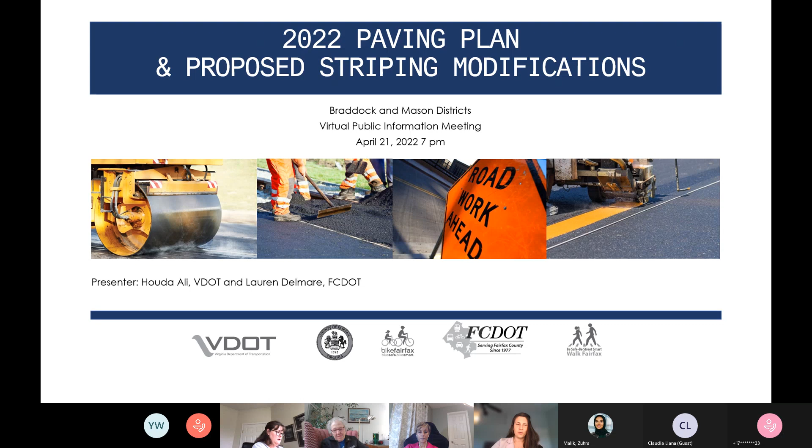Great, thank you so much. So I'm joined today by Houda Ali of the Virginia Department of Transportation, and we're going to go ahead and go over the 2022 paving plan. Houda's going to take over, and then I'll describe the proposed striping modifications that we have in the Braddock and Mason districts this year. So I'm going to turn it over to Houda to get us started.

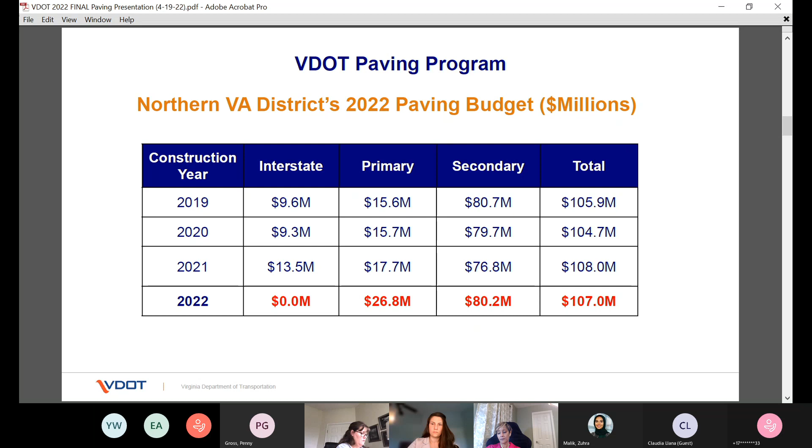Moving to planning and construction for paving. The construction aspect of paving is a seasonal process during the warmer weather months, from spring to early fall. However, the planning process is a year-round process. It starts in the spring going into summer and fall, with data collection for the next season.

Over the summer into the fall, we start analyzing the data, determine how many roads need to be paved compared to the available budget, prepare the schedules, and coordinate with central office. Later in winter, we close out previous contracts, put out new contracts for bid, and we award and execute new contracts by February into March of the paving year.

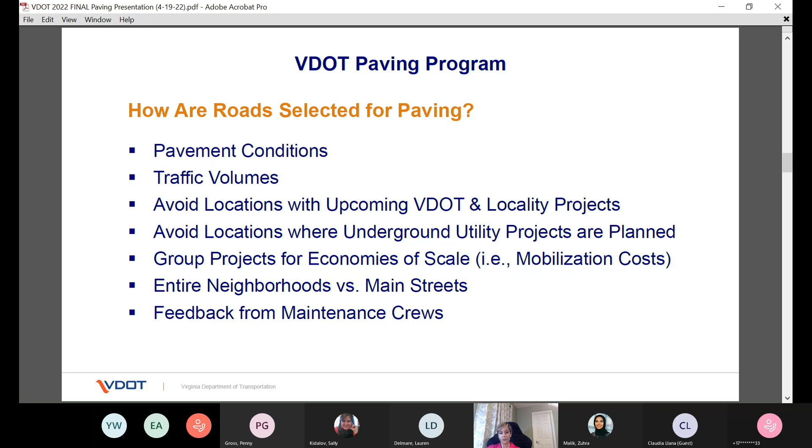So how are roads selected for paving? This is a question we get quite often. The process is generally data-driven based on several factors: pavement conditions based on current ratings, traffic volumes, avoiding locations with upcoming VDOT and locality projects, avoiding locations where underground utilities projects are planned, and grouping projects for economies of scale. What that means is we consider entire neighborhoods when we pave a main street within that neighborhood to achieve efficiencies in contractor mobilization. We also receive feedback from our maintenance crews who are most familiar with the roads in their areas.

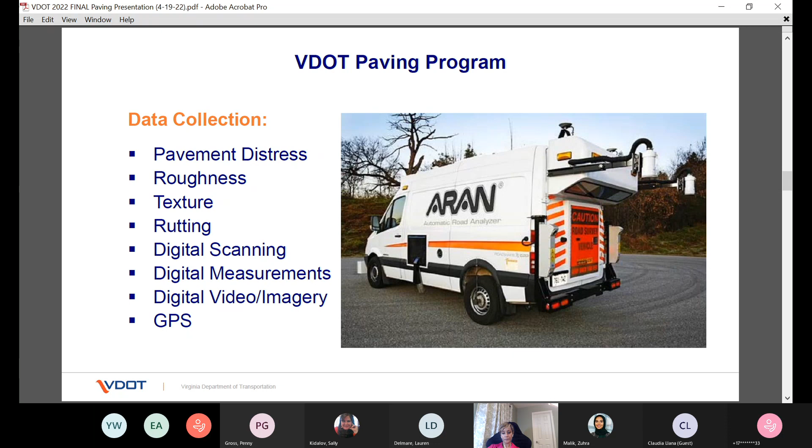So how frequently do we collect data? It depends on the type of road. Data is collected annually for interstates, primaries, and high volume secondaries with average annual daily traffic volume higher than 3,500 vehicles per day. For low volume secondaries, below 3,500 vehicles per day, with route numbers higher than 600, which make up the majority of the lane miles we maintain, including subdivision streets and neighborhood roads, we cover 20% every year with the goal of covering the full lane mileage inventory every 5 years. This longer cycle is mainly due to limited resources for data collection and repaving.

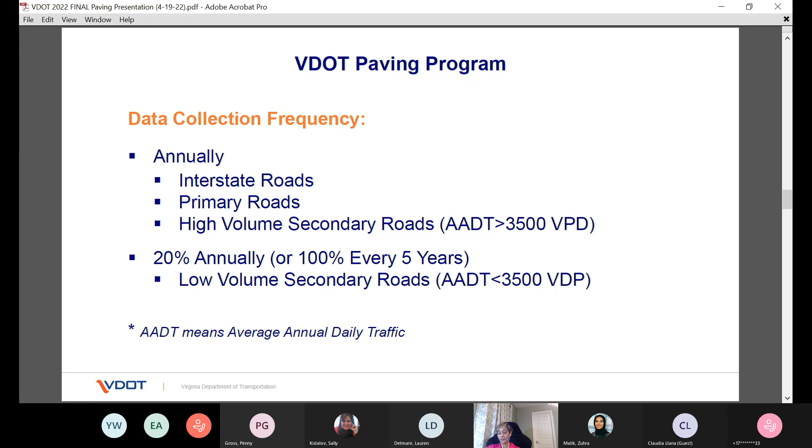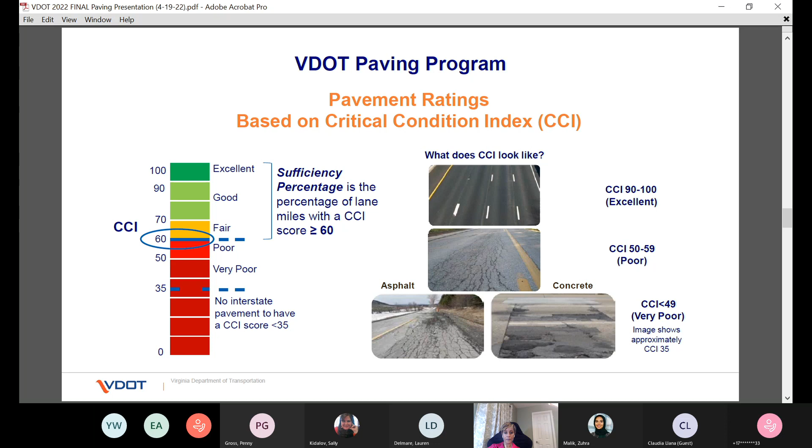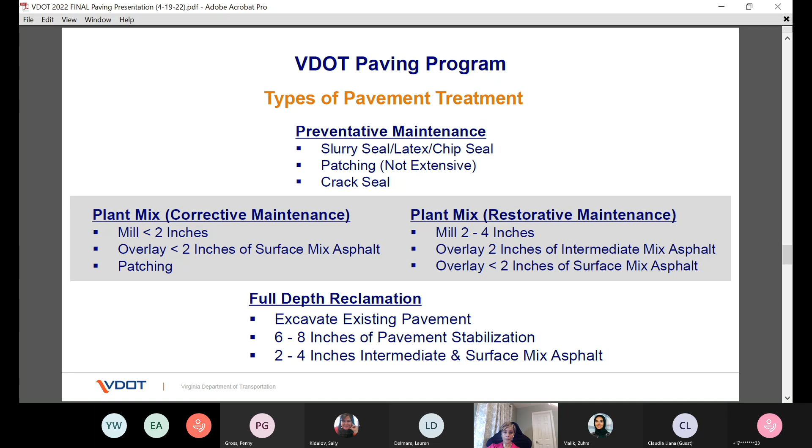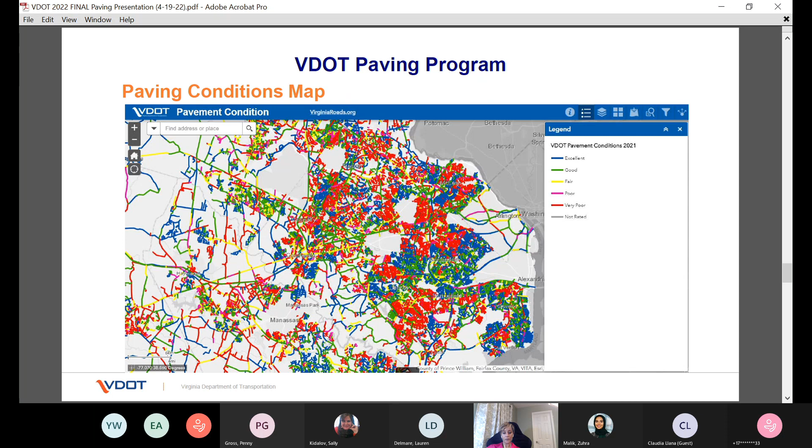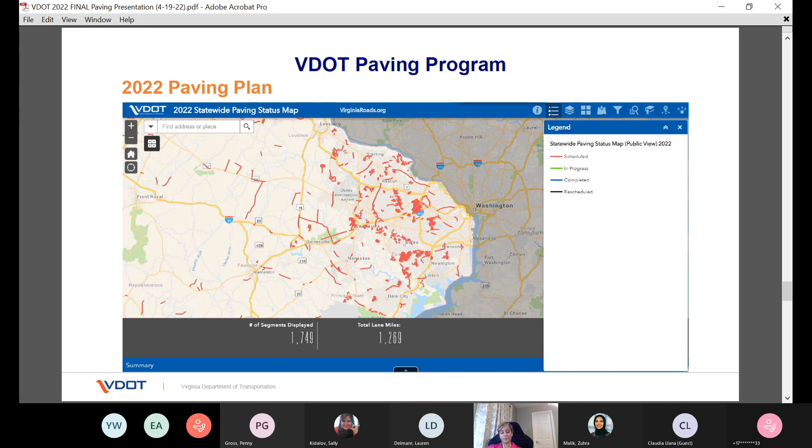On this slide, you see the 2022 paving plan. The plan is now available for public access. It shows the roads planned for repaving in red. As the paving season progresses, you will start seeing different colors appearing on the screen. This is an interactive map where you can enter your street name in the search function to find out if your street is being paved this year. If you click on the colored line on the road, a box will pop up, and when you click the arrow, you can see the direct contact information for the VDOT construction manager in charge of the project, including their name, email, and phone number. They can be contacted for additional information. I'll be demonstrating how to do that search in a minute.

In our last slide of information, pavement marking and striping. VDOT tries to take advantage of repaving to implement road striping in ways that enhance safety and operation. Striping could range from replacing in kind, putting back what existed before we mill and repave the road, to occasionally restriping to improve traffic conditions, such as extending a turn lane. And lastly, as Lauren mentioned at the beginning of this meeting, we take the repaving opportunity, in collaboration and close coordination with the county, to implement new marking patterns like road diets, which reduce the number of travel lanes to allow for enhanced on-road bike routes and pedestrian safety, which Lauren will speak about in more detail next.

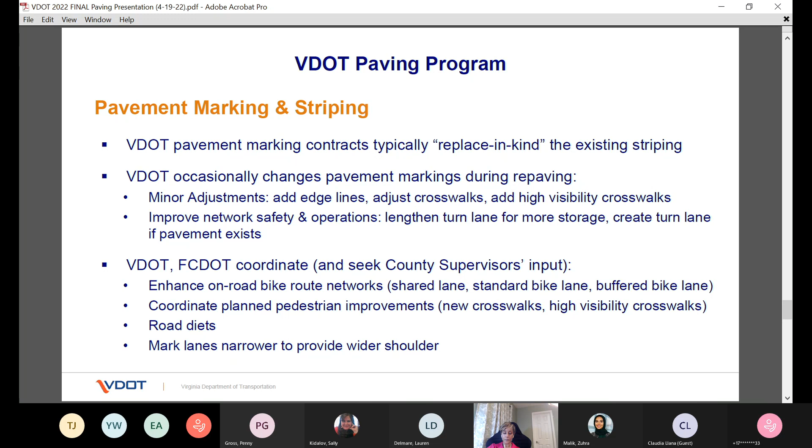On this last slide, some helpful information. In case you would like to report a road problem or maintenance request, you may call the 1-800 number for roads, or you can go to MyVDOT to enter your request. There are also links listed for the pavement condition map and for the 2022 paving map, which I would like to show in a minute.

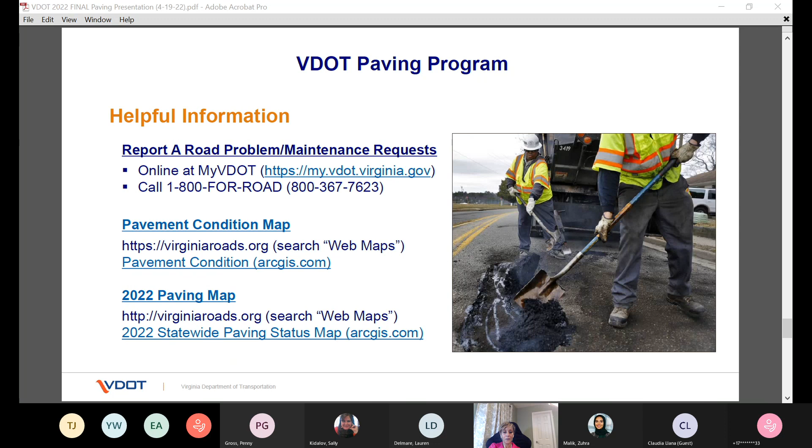Do you see that link? No, we're only seeing, oh no, we're just seeing you. Okay, let me see.

How about now? Yes, now we see the paving map. So as we mentioned, it's an interactive map. You can zoom in, you can zoom out.

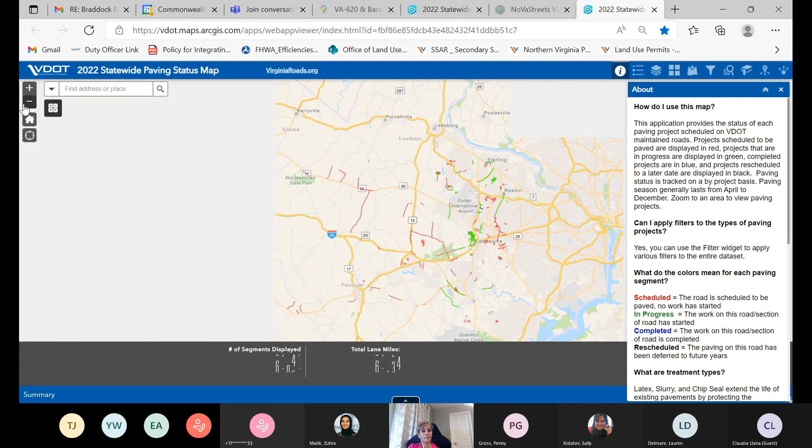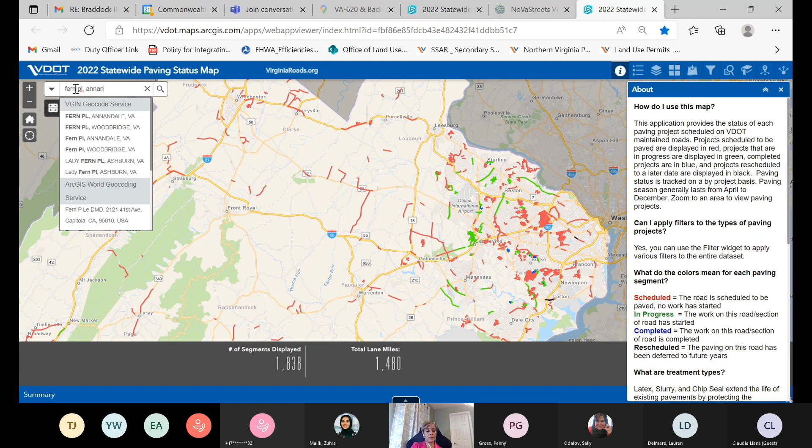For example, I'm gonna look up Fern Place in Annandale. You type the road, you click enter. As you can see, it's now zoomed in into Fern Place, Annandale. The road is marked in red, which means it's on the schedule.

Now, if you click on the colored part of the road, a window will pop up with the project manager name, phone numbers, email address, and the contractor information. You could also see additional information about the street itself, like the type of treatment, schedule, and more details.

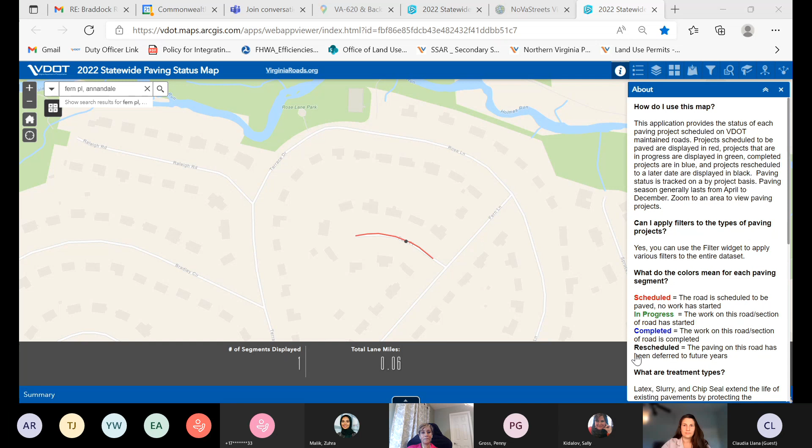All right, so as Huda indicated, we are really working on this in partnership with VDOT. When they conduct this program, we started several years ago looking for opportunities to change the striping on the roads in order to improve the facilities for all users.

Sometimes we look for bike lanes, we always look for crosswalks, and sometimes we even are just looking to add striping in order to have a traffic calming effect on these roads. So it's really been a partnership between our two agencies, and I'm going to go over the striping modifications, what we look for, and what we're proposing in the Braddock and Mason districts this year.

And then we'll have an opportunity for feedback from you all if there's anything you think we've missed in looking at these locations, if you've familiarized yourself with the map this year, or if you want to follow up. We'll have an opportunity for that in the coming weeks as well.

So as I was just indicating, we are really collaborating on this effort, and this slide outlines the shared responsibilities that we have for this program. So when VDOT releases their draft paving schedule for the following year in the fall, we look for opportunities for improvements.

They're releasing it just to us. It's not public at that time, because the final roads, as Houda mentioned, are determined based on the funding resulting from snow removal and other things that happen in the winter. But we do look for new crosswalk markings, widening shoulders and medians, sometimes by shifting the lane markings, the need for bus stop relocations, and also bike lanes and turn lane additions wherever we find they might be suited. VDOT does develop the striping and signing plans with their consultants and then coordinates the implementation with their contractors.

We lead the public engagement, like tonight's meeting, and coordination with the district supervisors. VDOT also identifies and reconstructs any substandard curb ramps or median roll-throughs to improve accessibility along the repaved roads. And then we install the signage associated with bike lanes, road diets, or new crosswalks, but we're usually finishing that up the winter of the year after paving.

So one of the main things that we look for is crosswalk improvements. We study places where we think pedestrians may be crossing to determine if those locations meet VDOT warrants for marked crosswalks. That means we need to count at least 10 vulnerable pedestrians in an hour, meaning disabled or under age 15 or over age 60, or 20 pedestrians in an hour who don't meet the vulnerable notation by VDOT.

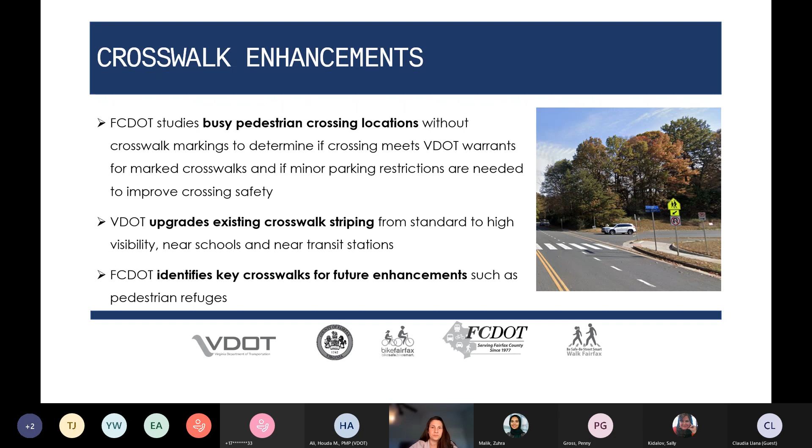We also look along the roadway linearly to repurpose underutilized road space. Many roads in Fairfax County were built wider than needed, with too many travel lanes or wider travel lanes than we consider standard today, and that can sometimes lead to speeding or inattentive driving.

So when we repave the roads, we right size them to meet the needs of users today, narrowing lanes where appropriate to the standard, which is 11 feet. This really improves safety for all road users at very low cost, because we're essentially putting back the same amount of striping in a slightly different location, sometimes with a little extra striping.

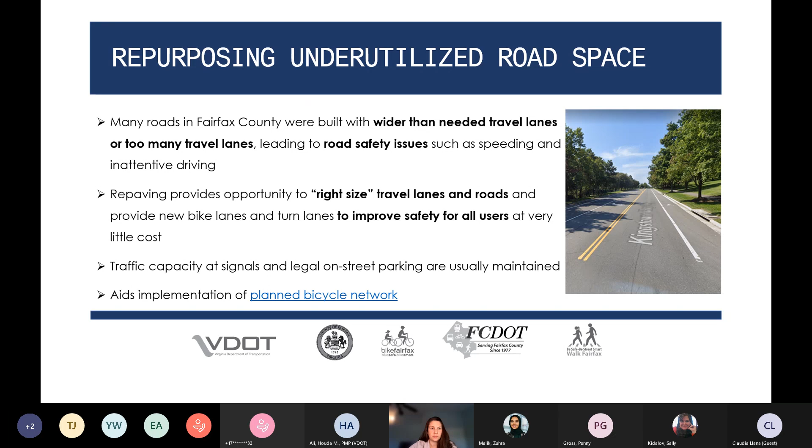The traffic capacity at signals is maintained, and legal on-street parking is typically maintained, except in cases I'll discuss in a moment where we have sight distance issues for crosswalks. This also helps us implement the planned bicycle network.

On the next slide, I want to show you where we're addressing speeding concerns. This is on Annandale Road in the Mason District. Before, you can see the travel lanes are quite wide. In the after, we're able to keep the existing parking, add bike lanes, and still achieve both travel lanes, but they're much narrower.

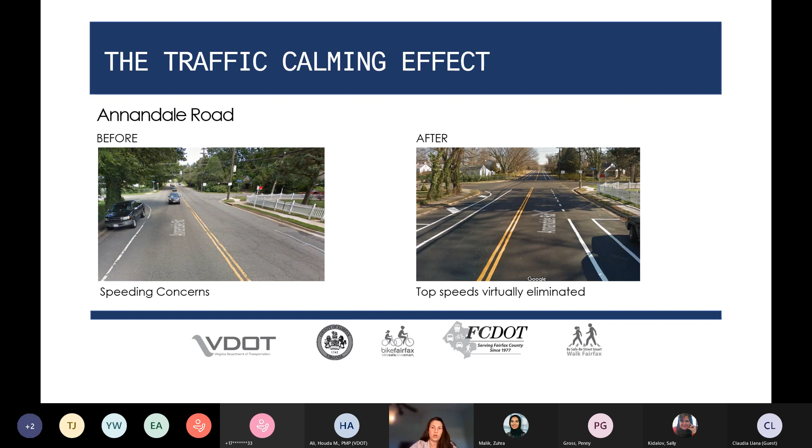When we've done this in the past, we've observed or counted the speed of vehicles before and after. Though the median speed doesn't change significantly, it does reduce the top speeds. So we see the highest speeders are essentially eliminated, and we only see them dropping down to what was previously like the 85th percentile speed.

We have a variety of bicycle facilities in Fairfax County. This slide shows the ones we can implement through repaving, so I'm going to go over those, and I'll describe some of the others that we can't.

The first is a shared lane marking, or sharrow. That's a marking on the road that indicates where bicyclists should ride to be safest in the roadway. We're typically only using these where there's a gap in a bike lane. Sometimes that's at a signalized intersection where we needed to maintain roadway capacity, so we couldn't continue the bike lane through the intersection, and we will put a shared lane marking there.

Sometimes the roads weave in and out in width, and there are places where we cannot have a bike lane continuously, so there's a shared lane marking in the gap. That's placed sometimes in the middle of the roadway where it's most appropriate for a driver to fully pass the bicycle in the opposing lane, or closer to the curb where the lane is wider and the driver can pass while staying partially in the lane.

Then we have a standard bike lane. This is typically 4 feet wide when adjacent to a curb or the edge of the roadway in a section without curb and gutter, or up to 6 feet wide. This is a dedicated space for bicyclists that's striped only on the roadway.

Then we have a buffered bike lane, which includes a striped buffer, usually between the travel lanes and the bike lane. Occasionally that buffer will be between a parking lane and the bike lane, particularly in places with high turnover of parked cars and a lot of doors opening and closing. That gives a place for the door to open without striking a bicyclist in the bike lane.

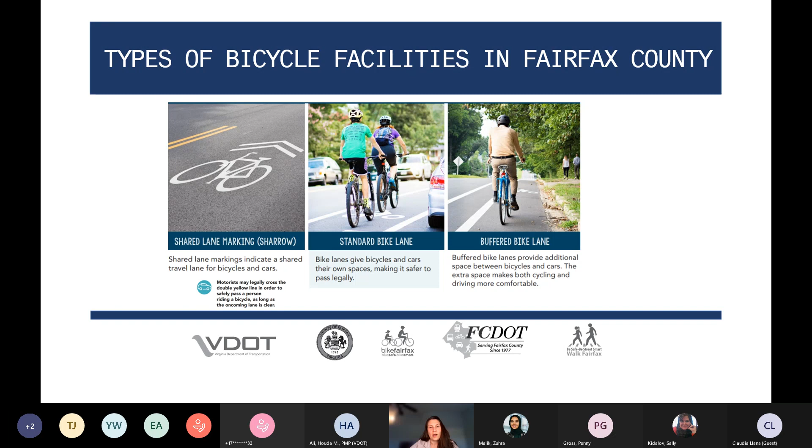As I mentioned, we have other facilities in Fairfax County. We're working to implement more protected bike lanes, and we have a lot of trails in the county and sidewalks as well that are bikeable. But we are not implementing those through the paving program or restriping, because that requires more than just the striping and signage we do through this program.

And then the strong and fearless, who are pretty comfortable riding anywhere as long as there's pavement, or even sometimes not. So we are primarily meeting the needs of the strong and fearless and the enthusiastic and confident with this paving program.

We acknowledge that not all of the interested and concerned riders are going to be comfortable riding on bike lanes. In some roadways they will be, and so in some roadways we are able to meet the need of that group, but this is just the limitation of this program. So I just want to acknowledge that there are many people who might be on the call tonight, or your friends and family, who might not be comfortable riding on these lanes, all of them, but we're still meeting a portion of our riders, and we're still providing other benefits by adding bike lanes.

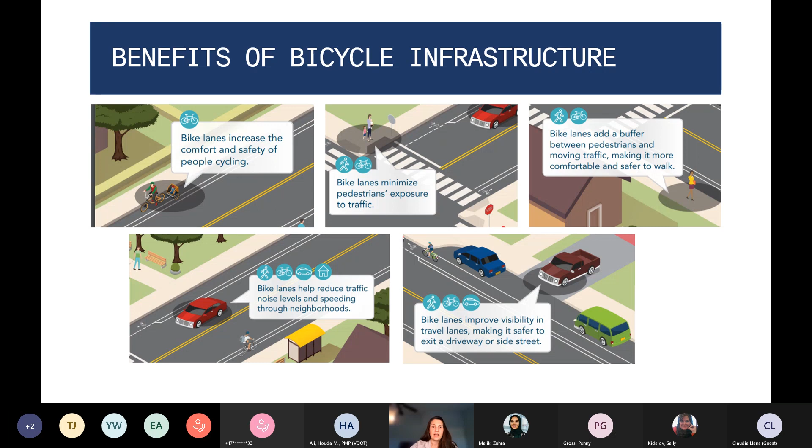So now I'm going to go into the proposed facilities in these districts. We're actually not proposing any bike lanes tonight in either of these districts, but we will discuss proposed shoulders and proposed crosswalks in Braddock and Mason districts.

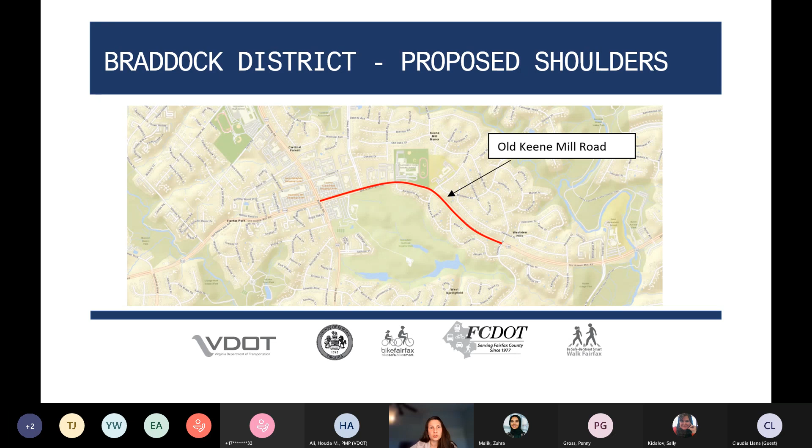So the first is proposed shoulders in the Braddock district. Today we're looking at Old Keene Mill Road between Rolling Road and Greely in the Braddock district. This has two different road configurations. In both cases it has 4 travel lanes with medians and turn lanes, but there are some sections where there's a very narrow shoulder that exists today and no curb and gutter, and some sections where there is curb and gutter along with sidewalks, but there's no bicycle facilities.

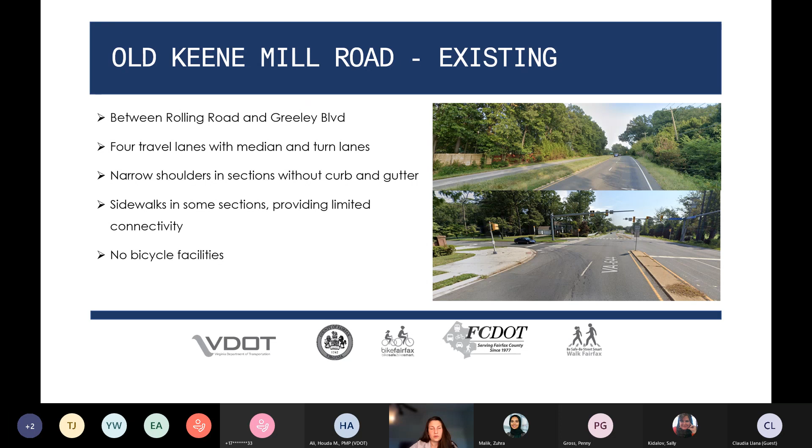The proposal is, anywhere where there is currently no curb and gutter, we would narrow all of the lanes to 11 feet and add the additional width, which is about 2 to 3 feet on each side, back to the shoulders. That would allow a place for people who are already going to walk or bike on this street, but don't have a sidewalk or any other facility, a place to do so more comfortably. It's not a full bike lane or a sidewalk by any means, but it's just providing a little extra room on the outside of the roadway.

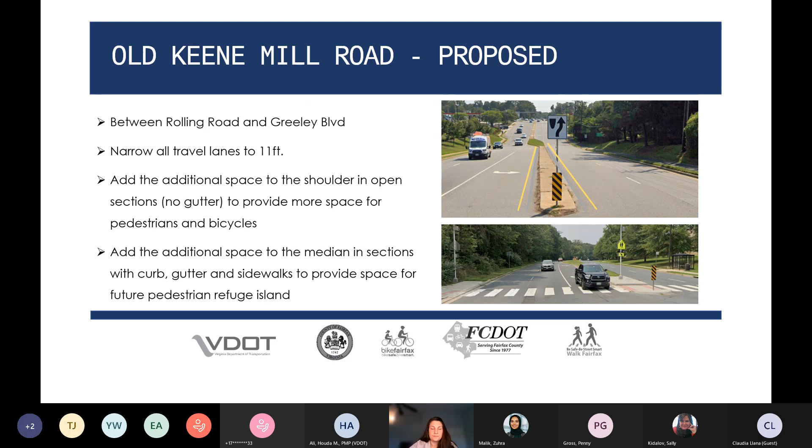Then anywhere where we do have curb and gutter, we're going to narrow those lanes still to 11 feet, but put that extra width into the middle of the road. That's because in the future we could come through, and if you see the image on the lower right, we could actually make a formal pedestrian refuge island in locations where there's a crosswalk if we have a little bit more width in the middle of the roadway. And if someone's crossing today, it gives them a little bit more shy distance to the travel lane if they have to stop on the median today.

In Braddock District, we also have 2 changes to proposed crosswalks. The first is at Greeley at Bellamy. We are proposing a new crosswalk crossing Greeley Road. The north side is the Braddock District and the south side is the Lee District, near West Springfield Elementary School. We counted 24 pedestrians crossing Greeley Road in 1 hour, and in order to add a new crosswalk, we need to restrict the parking to achieve adequate sight distance. The parking restrictions are shown on this graphic in yellow.

The next location is—I'm sorry, I have Greeley and Bellamy twice. We actually have another one at Greeley and DeLand, which I must have copied over the wrong slide. It's just down the street, just north of West Springfield Elementary School.

That one's an existing crosswalk today where we're proposing a similar parking restriction in order to achieve sight distance. So we don't actually have to do this.

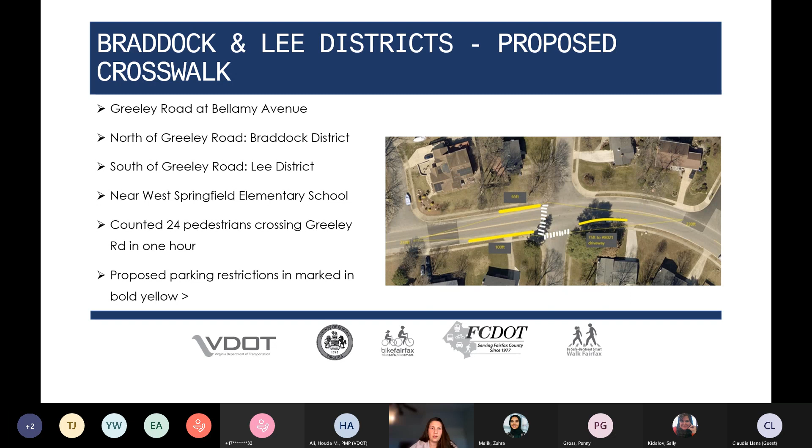We can leave the crosswalk in place as it is, but we met with residents in the field when we were putting up signs for this meeting, and we were informed that there was some concern about the sight distance as it stands today. There's a lot of overflow parking happening from the school, and a lot of the vehicles are parking there during the school day. What could end up happening if we do this parking restriction is that it would just shift them further away from the intersection. They'll probably still park on the street, but just a little further from the intersection, and that would allow for proper sight distance during the school day when anyone might be parking there. So that's just an additional restriction that we don't have today at an existing crosswalk.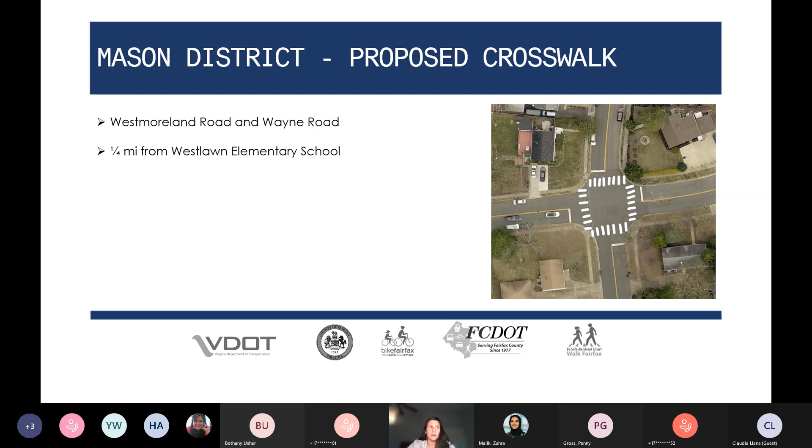This location is not part of larger striping changes, which would include considering things like striping out the corner radii, so we're not proposing that here. When we do bike lanes or other significant striping changes, we do look for opportunities to reduce those. But typically, pavement markings reducing the corner radii aren't going to have as substantial an impact as the curb being bumped out or having flexible posts. Due to maintenance constraints, VDOT doesn't maintain the flexible posts, so we don't put those in, except in very rare circumstances where they will install them.

So that's pretty much why you don't see them at this location, and why it's not done consistently, just because we're really only looking to do that where VDOT's contracting essentially allows them to make changes on the roads where we want bigger changes. They're not standard across the board for curb extensions or radius reductions through striping. We do look for opportunities to expand on that, and for projects where we can make those kinds of changes with a curb or other more substantial efforts. Our preference at Fairfax County DOT is to try to put a refuge island in where there's space to do so, rather than a curb extension or bumping out the corner.